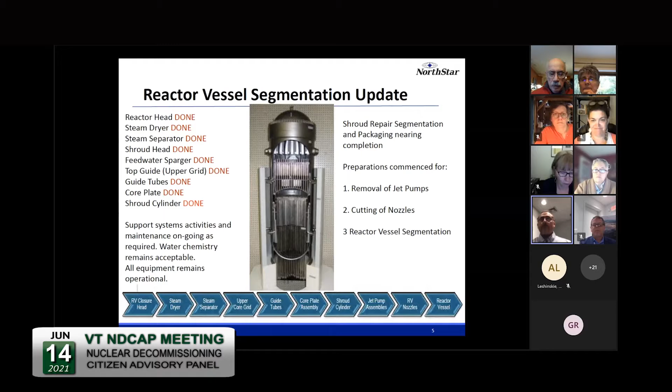So these are some photos of recent activities up on the refuel floor, in the dryer separator pit and into a storage rack, placing the last pieces of the shroud as it's been segmented in preparation for shipment, packaging and shipment in a custom box to Texas. Get an idea for the scale - you see how big those pieces are. You also notice the water clarity is a little degraded.

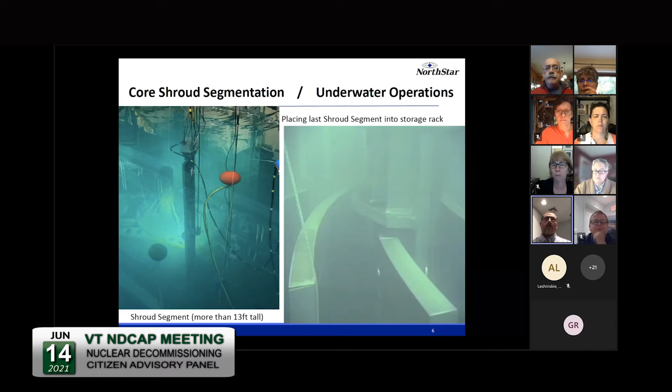The cutting operations and the garnet we use in our high pressure water jet system, when it's in operation, does tend to cloud up the working volumes. But we have systems in place to clean that as we go, and we're working on that as well as we continue the work.

A little more scale to the work that's going on. In the foreground, you can see one of those collection barrels of the filtration system I described, helping clean up the garnet and maintain pool water clarity. The pool water chemistry remains fine, and the activities and the ability to do the cuts haven't been significantly impeded, as once started, it's all done with a guided system that operates automatically once we put it in the right place and begin the cut. You can see the level of effort with the additional folks when they're moving even something as small as the spent fuel filters into a basket underwater.

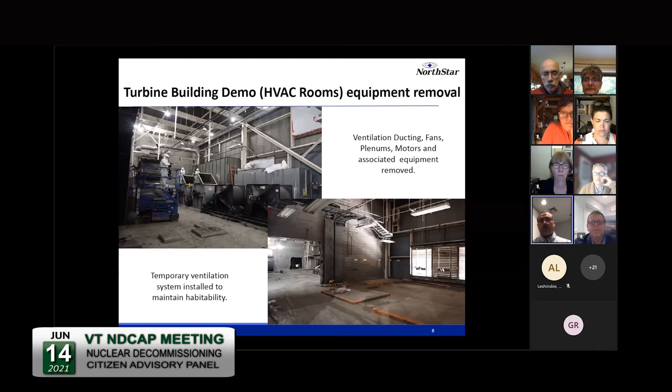Additionally, some of the remaining large bore steam piping that used to go to the advanced off gas building from the main condenser, or steam jet air ejectors, has all been removed, cleaned out, and shipped to Texas.

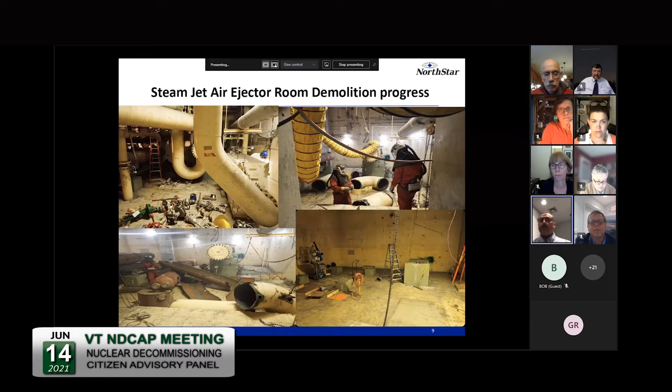Some of the very large components, these moisture separators, weigh about 114 tons each. They're suspended from the ceiling with large 2-inch threaded rods. The plant was sort of built around them, so the demolition process for these includes dismantlement and removal of the components in smaller pieces. This is the inside of the steam system. It's very low contamination levels, and we're able to manage this work very easily. I continue to be impressed with the long-standing good operation practices of the plant over 44 years, resulting in very easy to clean up boiling water reactor parts.

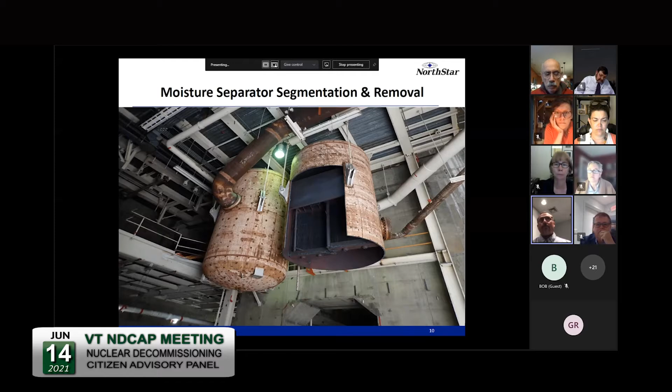Again, a little bit of an idea for scope and size. These are the main condenser tube bundles. The main condenser is kind of in 4 parts, 2 large tube bundles on each side. To the right of that photo is an identical photo, but those huge tube bundles have already been mostly removed. You can see right through the main condenser into the rest of the heater bay area in the turbine building.

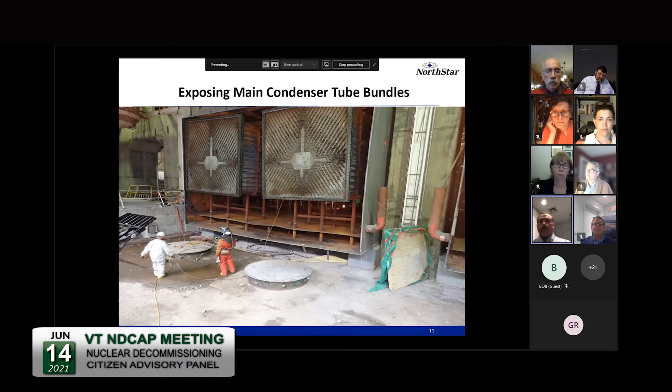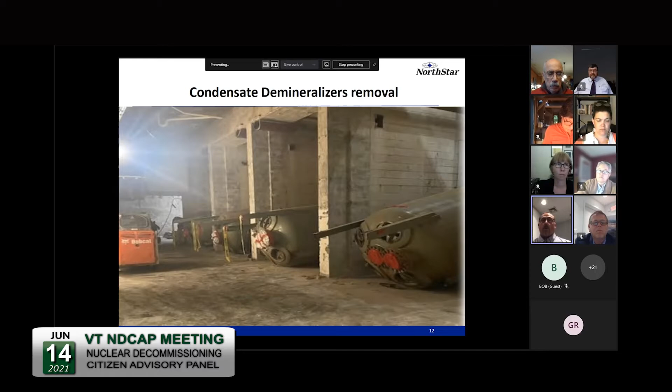Additionally, a little deeper into the turbine building, some of the water systems used to polish the water prior to it going to the reactor were the condensate demineralizers. The block walls have been removed, and these large vessels, which had been empty since 2014-2015, have also been removed, pulled out, and loaded into rail cars and shipped to Texas, allowing the building structure to be accessible to remove the internal and wall piping, and then ultimately to remove all of the concrete, rebar, and block walls themselves.

Again, in the few places vintage to the Vermont Yankee construction, we had materials that required removal, such as the epoxy floor coating in the turbine building, especially at the 232 and 222 foot elevations. Those floors have been scabbled up, removed, and sampled, and that's all part of the process for ensuring all the contaminants get out of the structure before we do the major demolition. Same thing goes for insulation on wires for PCB if we find any, and other contaminants as the decommissioning continues.

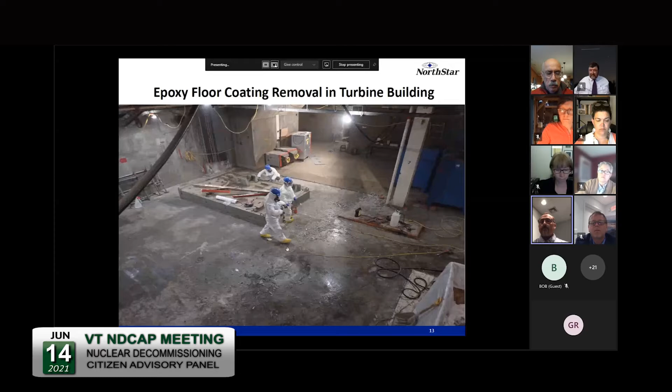Next slide, please, Tony.

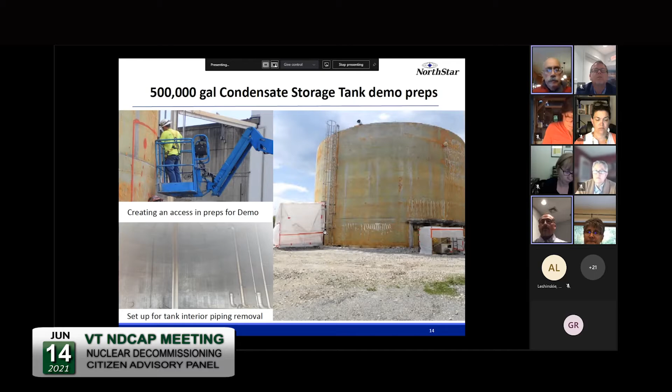I had a little video of it, but it's kind of loud and boring and it just falls over, so I'll spare you guys that one. Maybe we'll get it in one of the next presentations. I could sneak it by the screeners.

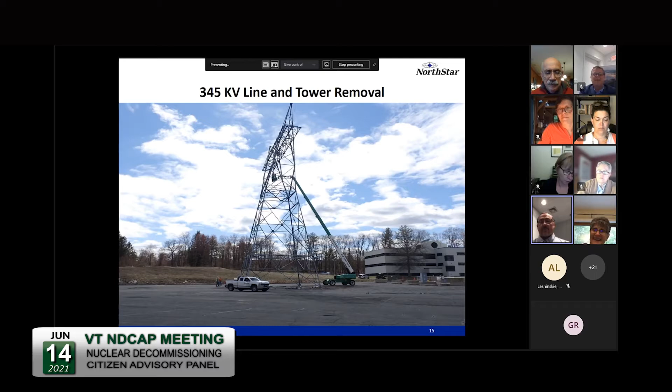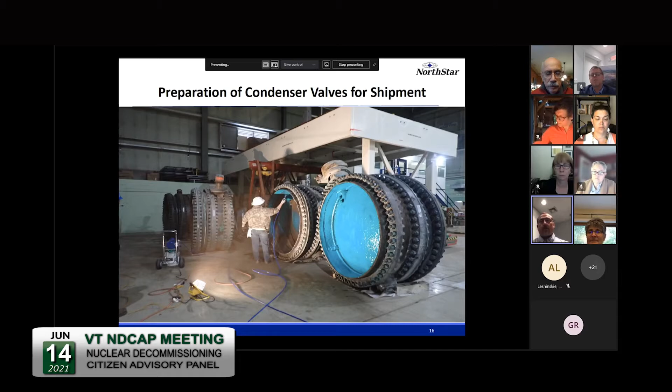Next slide, please. As far as the non-radiological site characterization or remediation, we continue to work and have a bi-weekly call with the various agencies. We just had one at 3 o'clock this afternoon.

We continue to work through the post-demolition survey and sampling plan, which has been approved. We have all that framework in place to do sampling underneath of building slabs to get soils and pipe trenches once they're exposed. One of the things about the way we're building this plan out is that it allows us to do the work at the right time with the right group of people, to make us more efficient and ensure that everything is rapidly identified and managed with the resource allocation necessary as soon as possible.

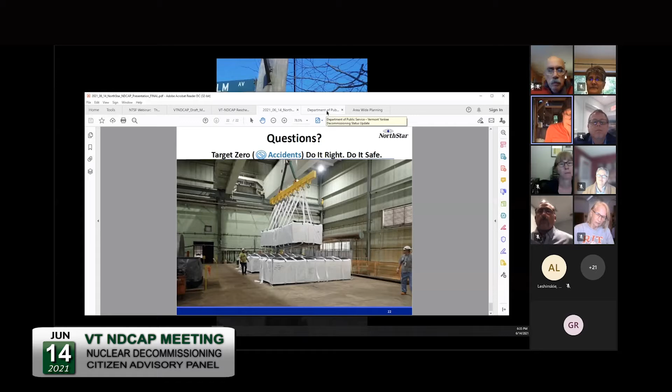Thank you. Good evening, my name is Eric Guzman. I'm a staff attorney with the Department of Public Service in the Public Advocacy Division. I'm here to provide a brief update on the monthly reporting since the last committee meeting in April, as well as provide a brief update on the annual reporting document submitted to the department, pursuant to the Memorandum of Understanding in Docket 8880. Joining me on the call is Nicholas Kapik from 4 Points Group, which serves as the department's financial and technical consultant for oversight of the decommissioning of Vermont Yankee.

And Tony, if you can go to the next slide, please. So just an overview of the department's role for anyone who is new to the meetings. The department's oversight role is twofold. The department first receives monthly and annual financial reporting documents. This is to assess the viability and financial assurances under the MOU, as well as determine the financial performance of the project overall. The department also confirms the technical work conducted by NorthStar to ensure that it's consistent with the monthly status reports that we receive.